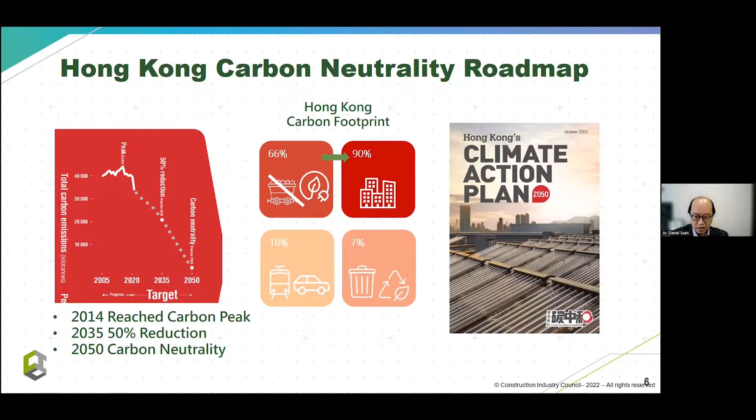It's fortunate enough that Hong Kong has already reached the carbon peak in 2014, but we still have a lot of things to do to achieve carbon neutrality by 2050. The climate action plan is really one very big challenge for us here, and also for the Asian countries. Out of the 66% of energy consumption, there are 90% relating to the building sector or construction sector. So it's really a huge challenge for our construction industry here.

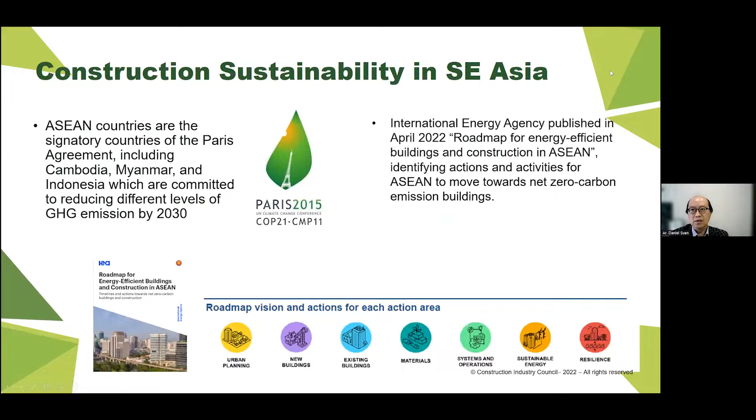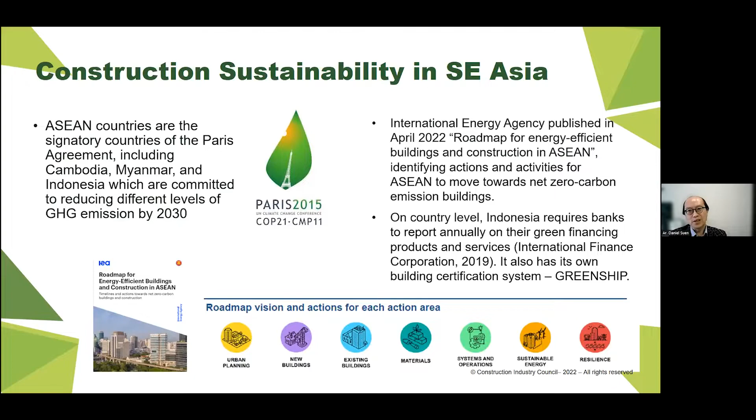For sustainability in Southeast Asia about construction, we understand Cambodia, Myanmar and Indonesia are all committed to reducing different levels of greenhouse gas emissions by 2030. We also have the roadmap for energy efficient buildings and construction in ASEAN. On country level, Indonesia, as we all learned from our honorable speaker earlier on, has some GREENSHIP system currently taking action.

Let's see some key figures. For ASEAN's building sector, it accounts for 23% of final energy use and 24% of carbon emissions. It's a bit worrying that ASEAN's building energy consumption is expected to grow by around 60% by 2030. Yet there is a goal to achieve energy intensity reduction by 2025, reduction by 32%. So we all need our buildings to become highly energy efficient and use primarily zero carbon energy sources as far as practical.

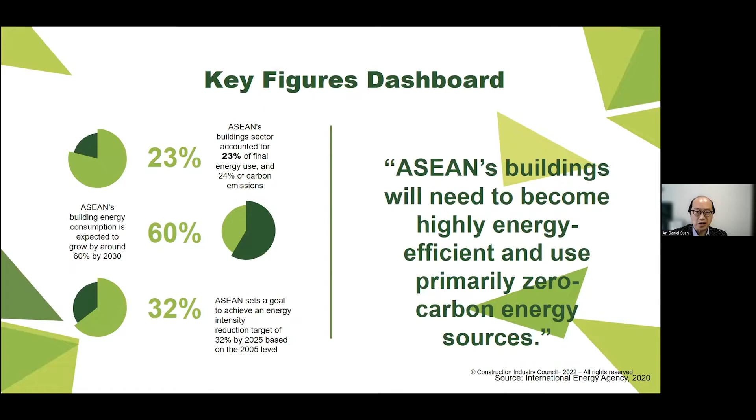Just a very quick review - the SWOT analysis of Hong Kong, how we could contribute to the ASEAN green buildings. Our strength: we have strong expertise in construction of high-rise and green buildings, and application of new technologies and know-how. Unfortunately, our weakness is in general we have quite a lack of local market intelligence - of course a number of speakers earlier on have already introduced many knowledgeable information for us - and we are still unfamiliar with the local rules and regulations of various countries.

In terms of opportunities, we are having rising awareness of environmental protection, and growing demand for new technologies and green building. Whereas the threat for us is increasing competition from foreign companies with price competitiveness of local construction service providers.

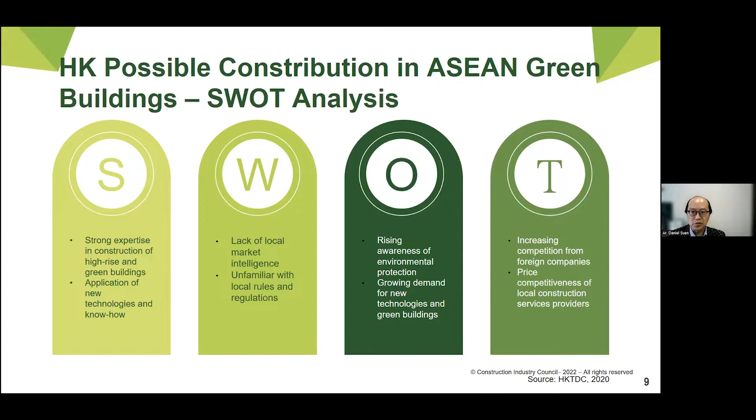For the sustainability initiatives for the Hong Kong construction industry, we in general have 6 approaches. The first one is carbon assessment - I'll elaborate them one by one later on. We have green finance, sustainable culture, green and low carbon materials, waste management, and innovation and digitalization.

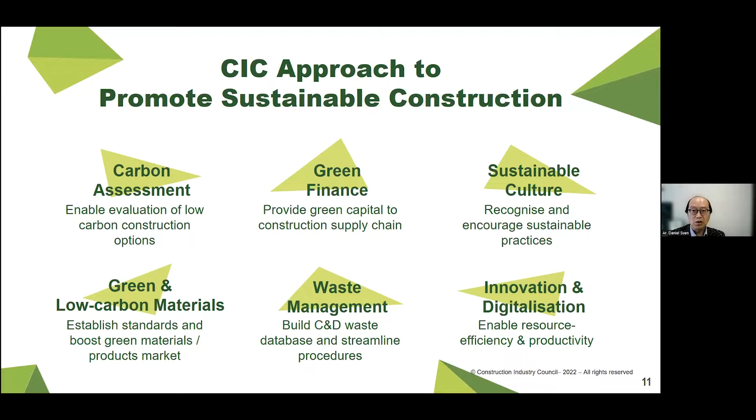A construction roadmap - we hope we can develop this in the number of years ahead of us. Back in 2018, we already conducted the first CIC Sustainable Construction Award to promote industry awareness towards sustainable construction. By 2019, we got a carbon assessment tool available, and we also have green product certification. By 2021, as also mentioned by CS earlier on, we have the sustainable finance certification scheme.

This would encourage people to use a finance model for their construction business, so long as they achieve a sustainable standard. And this year we are launching a smart waste management plugin. As Professor mentioned earlier on, smart waste management is also one key issue for us to tackle.

We expect by 2023 we would more or less generate a roadmap for us to move towards carbon neutrality by 2050.

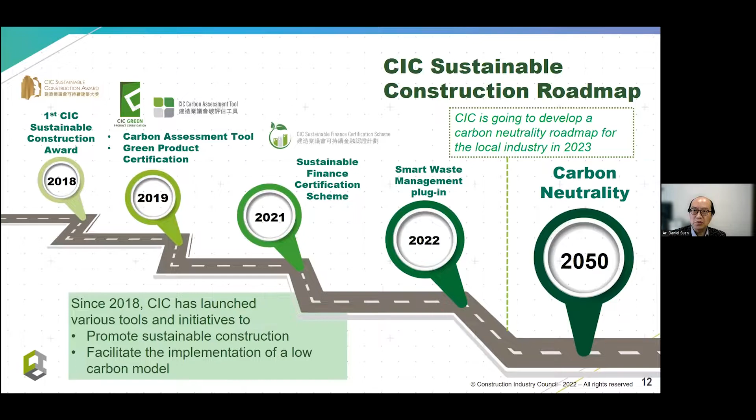The first one, green product certification. We officially launched in November 2019. We evaluate 5 environmental aspects, namely carbon footprint, energy, waste and water efficiency, toxicity, recyclability, and resource consumption. We currently cover more than 28 material types. We have certified more than 700 projects, and we have 6 credits attained under BEAM Plus New Building 2.0.

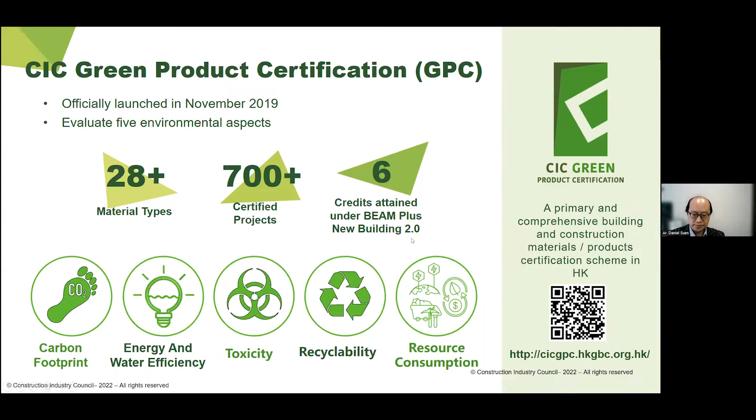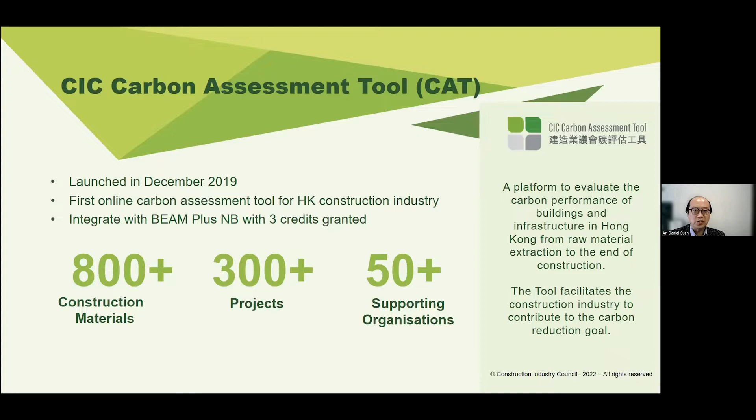The carbon assessment tool, the first online carbon assessment tool for the Hong Kong construction industry, has been launched, with integration with BEAM Plus mentioned earlier, we got credits there. It covers more than 800 construction materials, more than 300 projects, and more than 50 supporting organizations are with us.

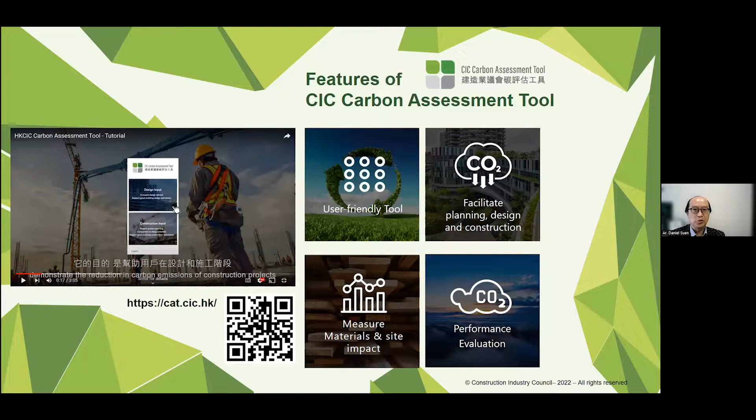Well, let's skip that. That's a very quick glimpse of what's use of that. The next item is this Sustainable Finance Certification Scheme.

The objective is to provide a common framework and user-friendly assessment system to facilitate the application of sustainable finance for the construction industry in Hong Kong and the Greater Bay Area. I think this is of good reference for our sister countries like Indonesia, Myanmar, and Cambodia, a good move for you to consider. For Hong Kong, our SFCS supports the government towards carbon neutrality and responds to the growing trend of sustainable finance across the construction industry.

We had the launching ceremony last year, which was well received by the industry, and we got some international principles already verified. We are industry specific and designed for construction projects and industry players, with wide scheme coverage for common financial products adopted in the industry, and we have recognition from the Hong Kong Monetary Authority.

For the smart waste management plugin, the project commenced this year in March. It is a system to facilitate waste management and monitoring at construction sites in Hong Kong. We have those things digitalized, which is really critical. We provide supporting tools for on-site staff using real-time disposal tracking, and we've also plugged it into the CIC carbon assessment tool mentioned earlier.

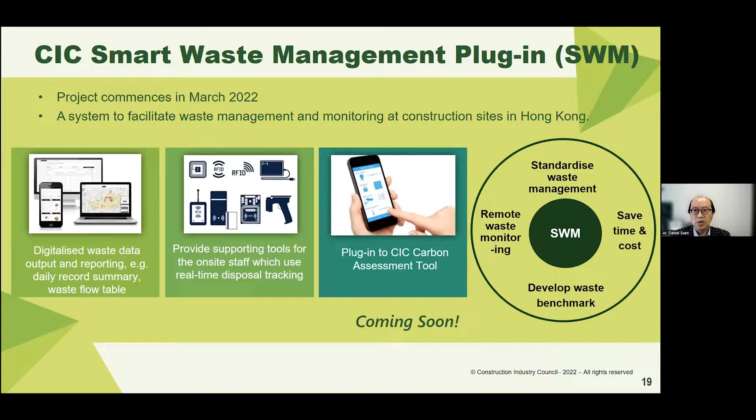You can see the current pain points of the industry on waste management: prevention is a headache, with illegal dumping, not much attention paid to waste reduction or recycling, and waste data manually collected and recorded on paper. It's time consuming for updating and cross-checking, human errors are common, and under constraints of space and time, contractors have low motivation to improve waste management practice.

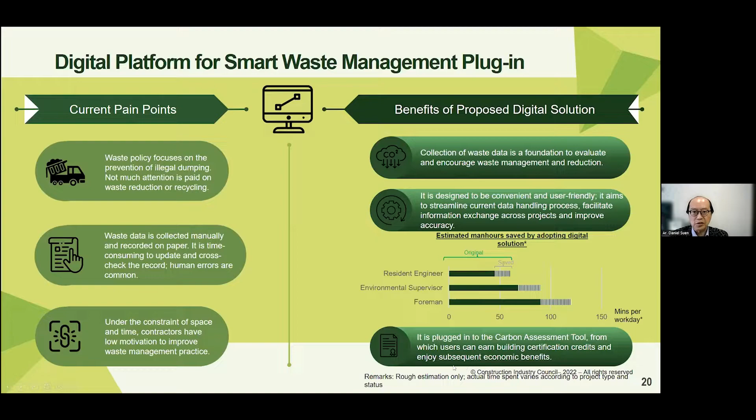With our smart waste management plugin, we have the benefits of a digital solution. We collect waste data to encourage waste management and reduction. It's designed to be convenient and user-friendly, streamlining the process and information exchange across projects. We gain accuracy and save time. The plugin is also very useful for CAT, the carbon assessment tool, where users can earn building certifications and enjoy subsequent economic benefits.

We've held the Sustainable Construction Award for a number of years. We had it in 2018 and 2020, and we will have another one coming in 2023, with applications opening late this year. The award recognizes sustainability best practices among organizations and practitioners, particularly the young generation of the construction industry. You can see we have quite wide coverage and a lot of attendance and projects covered.

Now we come to case studies of innovation. By the way, I would wholeheartedly invite all of you to join our Construction Innovation Expo 2022, forthcoming on 12th to 16th of December 2022, to be conducted in the Hong Kong Convention and Exhibition Centre. It's really worth it, and it also covers our sustainability subject discussed today.

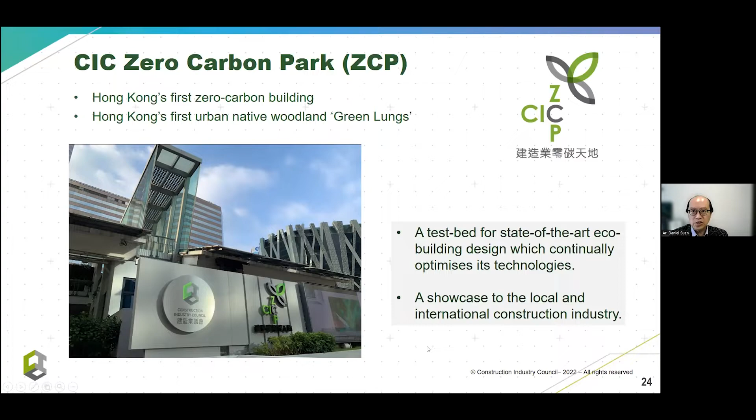Back to our example, our CIC has constructed a zero carbon park, serving as the first zero carbon building in Hong Kong. We also serve it as an urban native woodland green lung. It's a test bed for state-of-the-art building design and optimization technology, and a showcase to the local and international construction industry.

It's quite a beautiful piece of land, right? Please do come and enjoy the park, located in Kowloon Bay. For the design strategies, we have active systems with passive design, with renewable energy, landscaping, microclimate and water management systems, and low carbon construction and materials.

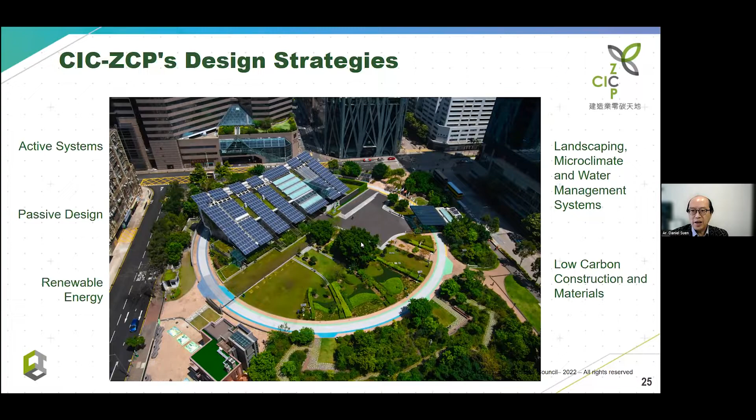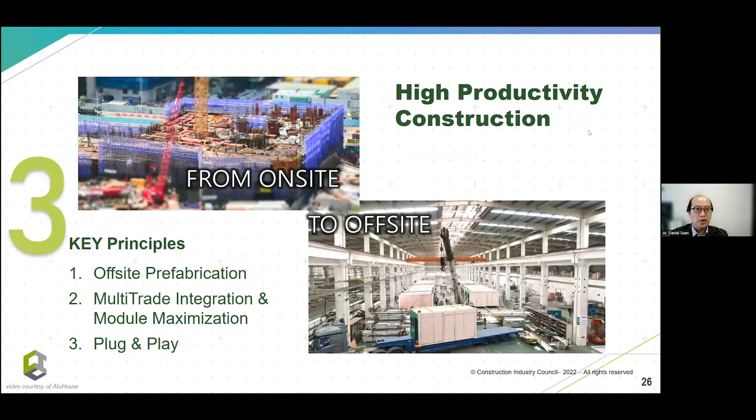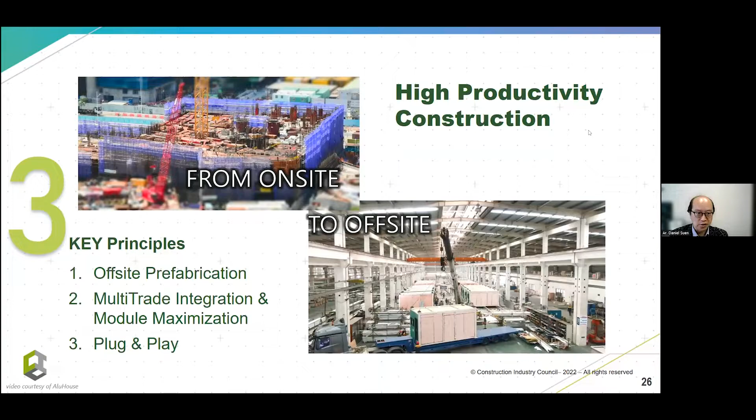Mind you, for the innovation, we cannot do away with high productivity construction, as currently highly promoted by our government. We would like to promote construction process moving from on-site to off-site. There are three principles here: one, off-site prefabrication; two, multi-trade integration and module maximization; and three, plug and play. This is really important for us to conduct our construction business in an environmentally friendly way.

MIC, modular integrated construction, is one of the brilliant examples of high productivity construction. It starts from prefab components, moving forward to advanced prefab systems, and then integrated sub-assembly, putting small parts together before shipping to the site. Finally, we have all of them integrated together, moving to modular integrated construction, MIC.

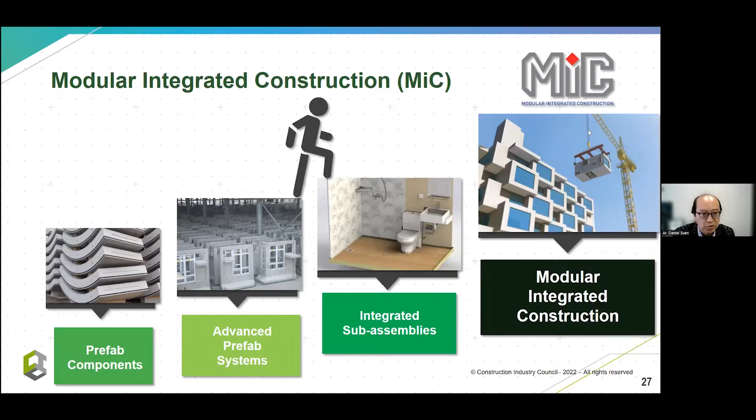We can find in the newspaper in recent months that MIC is really particularly successful in providing temporary hospitals and temporary decanting centers arising from COVID. I think it's also a very good case for our country friends to consider for fast construction projects anywhere in your place.

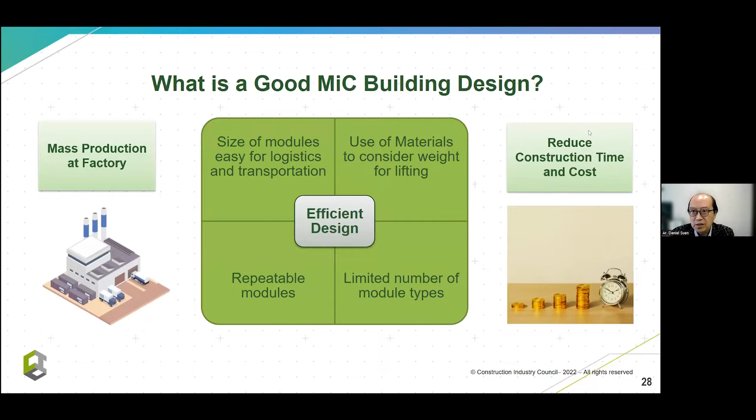What is a good MIC building design? We should make it an efficient design: size of modules, easiness for logistics and transportation, use of materials to consider weight for lifting, repeatable modules, and limited number of module types. With this, we can have it mass produced at factory, and at the same time reduce construction waste, construction time, and cost.

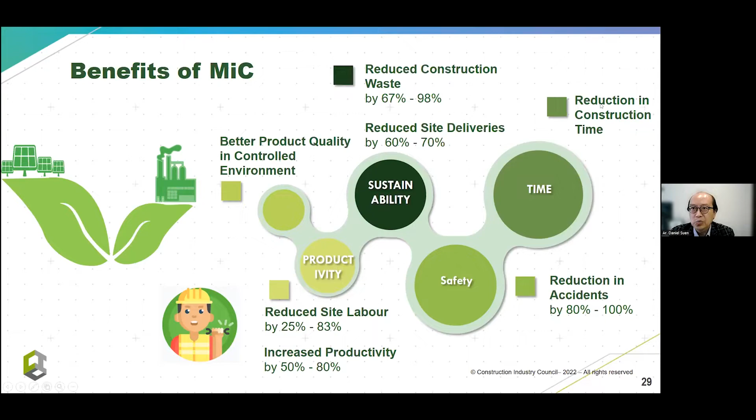The benefits of MIC include better quality control and productivity, reducing site labor and increasing productivity by 50 to 80%. We also reduce site deliveries and reduce construction waste very substantially, by more than 50%. Importantly, for safety, we reduce accident rates by 80 to 100%, and finally we reduce construction time as well.

All these emphasize on multi-trade integration. With MIC, we can apply it to MI residences, MI schools, MI hospitals, MI hotels, MI interiors, MI curtain walls, and MI foundations. All of these we may call MI infinity.

So let's have a glimpse of a video over here to share with you all.

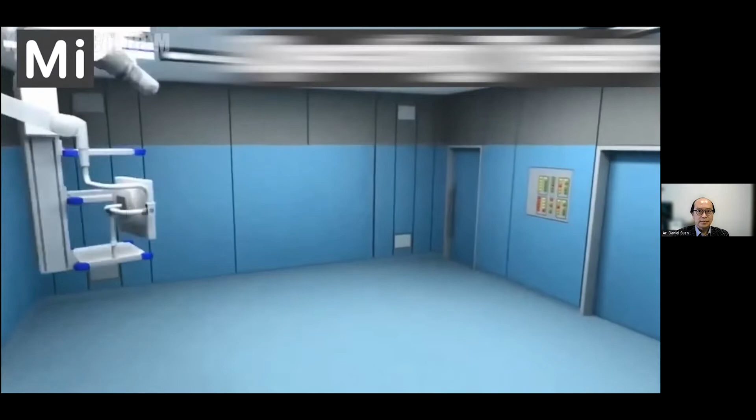So we can see that the power of MIC cannot be undermined. Let's see whether we can use this to help our move towards sustainability construction innovation.

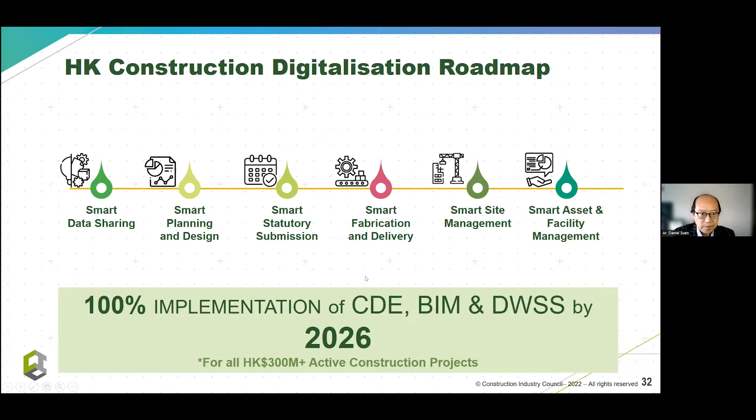Okay, for the other element we need to genuinely consider is digitalization. For all the works in the construction industry, if we are going to move forward in a smarter and faster pace, we need to consider digitalization. That's why CIC created a digitalization roadmap, and our goal for 2026 is to have 100% implementation of CDE, BIM, and DWSS, Digital Works Supervision System, for projects over 300 million Hong Kong dollars.

We have building information modeling, which has helped us move from very primitive hand drawings, and then better through AutoCAD. Now we promote using BIM, which is a complete cycle that allows for information flow from design to operation.

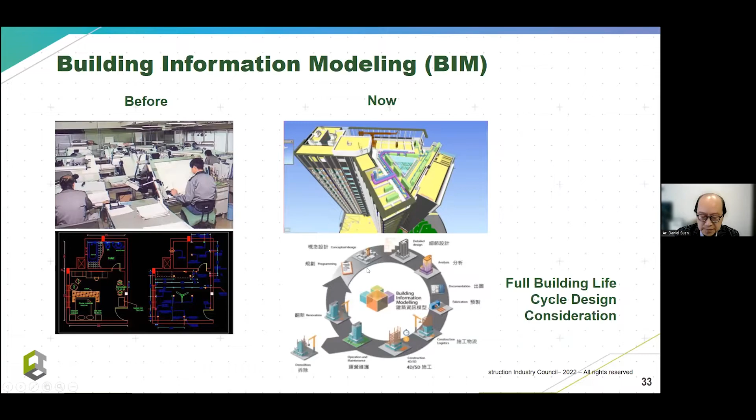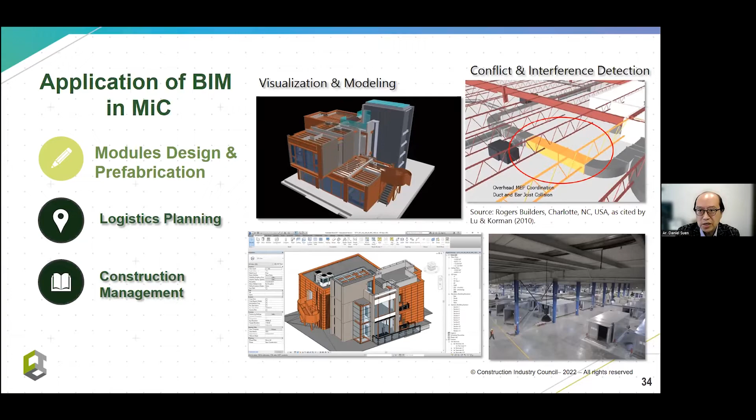The application of BIM in MIC: for module design and prefabrication, visualization and modeling is really important. Through BIM, we can preview all the things and review any conflicts beforehand. That's really important, not just having errors found on site and then redoing things, which is a waste of time, energy, and materials, and against sustainability.

On logistics planning, BIM also helps us tackle things like transportation, as currently most MIC units are constructed in mainland China and then transported to Hong Kong. The road network and sea route are really important and crucial for us to understand whether that is capable of transporting things in. With the help of BIM, we can identify which route can afford such large units to be delivered to site, which way we need to close the road temporarily, and so on. It's a very smart system for anticipating any problem and, more importantly, resolving them beforehand.

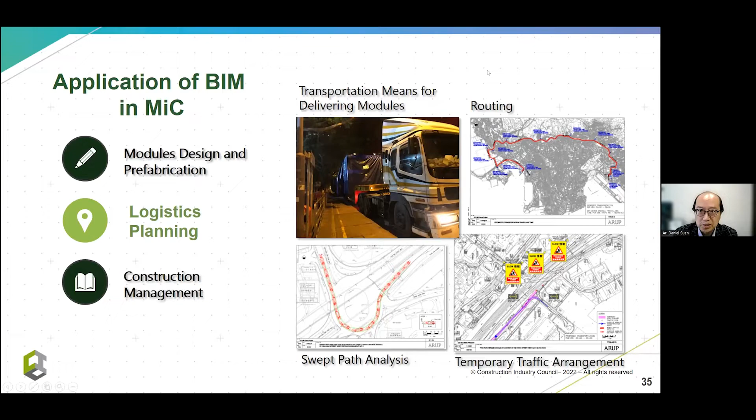Another issue is construction management. BIM allows us to have trial assembly in the factory. We have sequencing for modules, either through the computer or off-site, and with BIM we can have design simulation. That's really, really useful and important nowadays.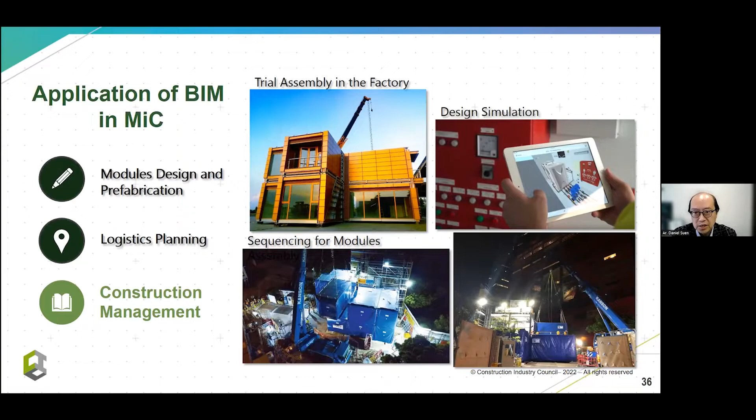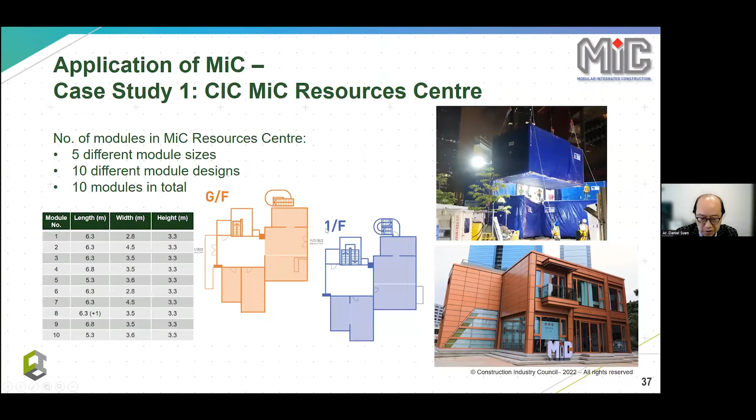Case study: again, our ZCP, Zero Carbon Park in Kowloon Bay. We have constructed a MIC Resources Center from MIC units, totally using 10 units to complete it. It's a 2-story building, very rapidly completed with modules delivered on-site and completed over a very short period of time. The units were delivered with all interior finishes completed, so it's a really efficient way.

Another more recent project is the Hong Kong Science Park InnoCell. That's completed in October 2020. It's a 17-story high hostel, providing over 500 bed spaces. Really, more than 400 MIC modules used over there. And the construction cycle of a typical MIC floor is only 3 days.

After review, we analyzed that we have advanced the completion by 5 months in an 18-month contract. Mind you, it's really substantial, more than a quarter faster. We can reduce construction waste by 20%, reduce non-inert waste by 80%, with 50% reduction of total construction vehicle count, and very, very important, zero work injury and zero accident. And also we have better air quality level, 50% reduction indeed.

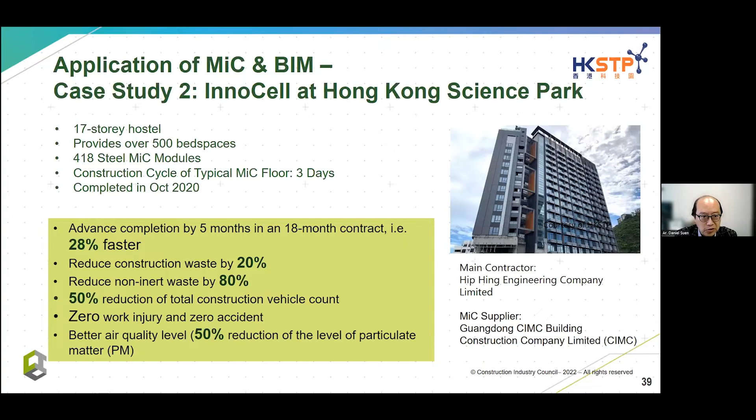Thank you, Mr. Suen. It's a very good comprehensive presentation on our technology. I think we are very successful in terms of Hong Kong and China integrations of these new technologies. What about Southeast Asia? If we're going to move into Southeast Asia in terms of construction there, the regulations difference, the labor difference, is there any case study that's successful in that way? And also about SMEs entering the markets. Can we take advantage of that technology base in Hong Kong?

Well, I would suggest it's really a very great opportunity for us, Hong Kong SMEs and any people with interest in entering into the construction market of Myanmar, Cambodia, and Indonesia. And mind you, just take MIC as an example, it's a very convenient product for transport. As our dear guest mentioned earlier on, for Hong Kong, we have quite a good achievement so far. But the success really relies upon our good relationship with mainland China, the Greater Bay Area in short. The production yards of the MIC are currently mainly located in the Greater Bay Area, and we have the transport down to our Hong Kong site very rapidly.